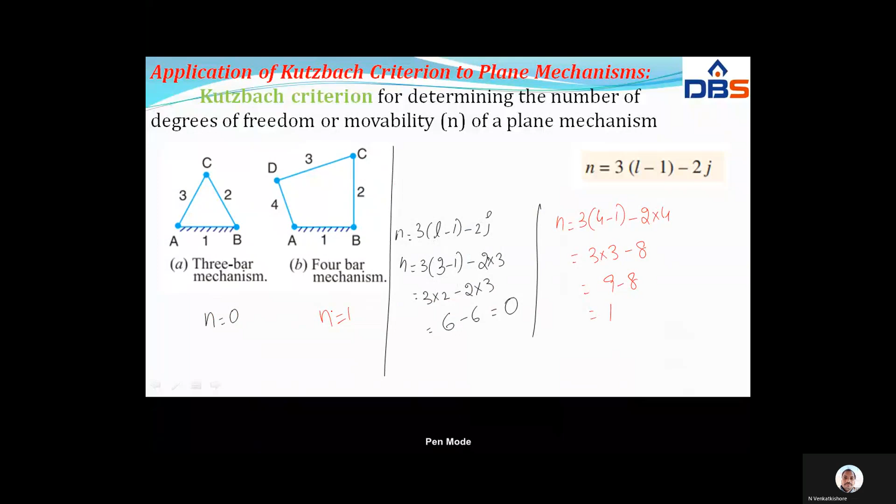So we will discuss these things at the end of this session. Then, the same way, we go for the next one.

It is problem C. n equals 3 into number of links, which is 5, minus 1, minus 2 into number of binary joints, so 3 into 4, minus 5 into 2, that is 10. So 12 minus 10. So for this case, n equals...

Then what about D? n equals 3 into number of links - 1, 2, 3, 4, 5 - minus 1, minus 2 into number of binary joints. Here the binary joints are B and D, so that is 2. Plus B and D are over, and one is A and C. A has 3 joints and C also has 3 joints, so 2 ternary joints equal 1 ternary equals 2 binary.

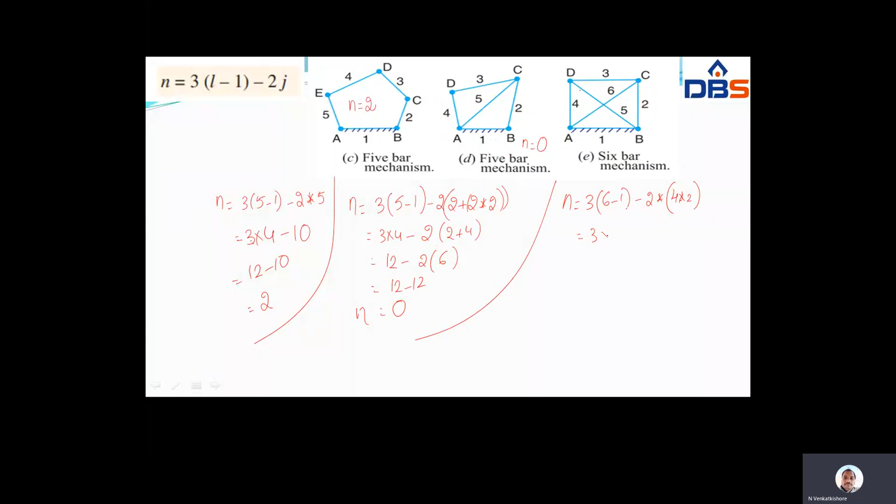Ternary, 4 into... so 3 into 5 minus 2 into... 15 minus 16. So minus, here n is equal to...

So now among all these we are concluding here. So we achieved n is equal to 2, n is equal to 0, n is equal to minus 1. So simply n is 0, 1, 2, minus 1.

So what is the case? When n is equal to 0, from the diagram, what are the problems we are having? In the problem A and D and B. See here 0, D and A. D and A, in the figure A and D, we are getting the number of degrees of freedom as 0. That means no degrees of freedom.

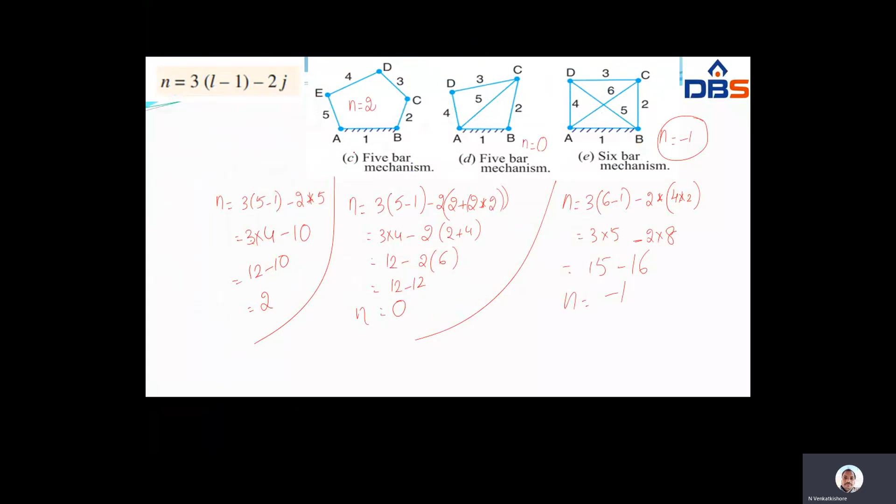When n is equal to 1, this mechanism occurs where? In B, figure B. So this mechanism can be driven by a single input motion. Next, n is equal to 2 means two separate input motions are necessary to produce constrained motion. That is occurred in figure D. So in figure C, we are getting the same. And whatever the last one, when n is equal to -1 or less, there are redundant constraints in the chain.

It forms a statically indeterminate structure. So it is not a structure. Beyond the structure, it is indeterminate, meaning we can't even frame the structure. So n is equal to 0 means it is a structure. N is equal to 1 means one single degree of freedom, one input motion is enough to move the mechanism. And n equal to 2 means two separate input motions are necessary to produce the constrained motion of a mechanism. N is equal to -1 or less than 0 is nothing but redundant constraint.

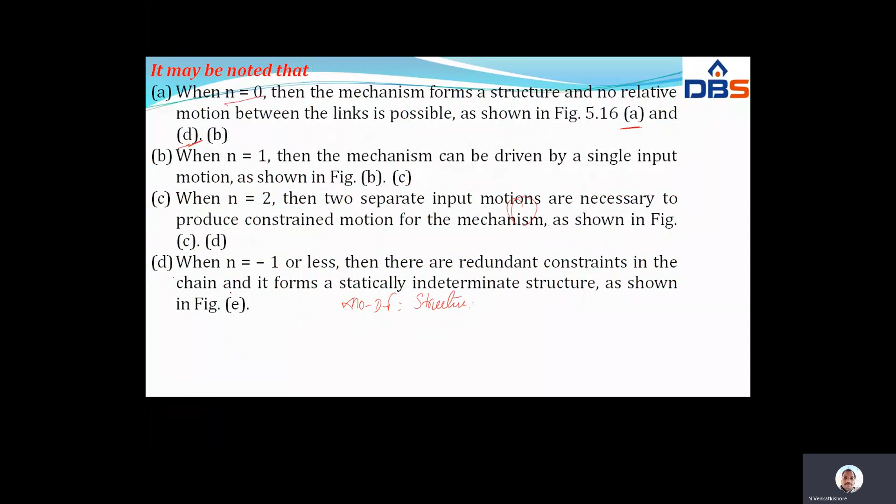So next we will solve the same equation for some different models. If you see here, this is also like the same thing, but with link 1, 2 and 3. So here it is of a structure like this, or the mechanism will be like this. Mechanism is one thing, one link was fixed, but here you just need to concentrate on this: second and third are framing a point, or they are in contact either by a line or a point. They are closely contacting, looking like a point or a line.

So the point or line means here the higher pairs come into the picture. Then the formula becomes n is equal to 3 into l minus 1 minus 2j minus h. This is the basic Kutzbach formula. Substituting: n is equal to 3 into number of links as 3 minus 1, number of joints it has 2, minus higher pair is only 1. So, 3 into 2, 6 minus 4 minus 1. So 6 minus 5, that equals 1. So in this case, 1 degree of freedom.

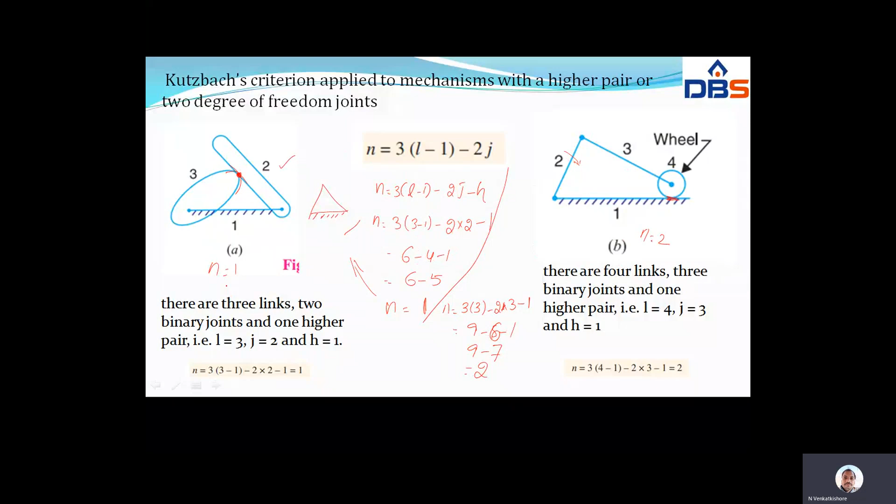Coming to Grubler's criteria for plane mechanisms. This mechanism applies only when single degree of freedom joints are there. So single degree of freedom means this equation will be applied. Grubler's criteria is only applicable for single degree of freedom, that means n equals 1.

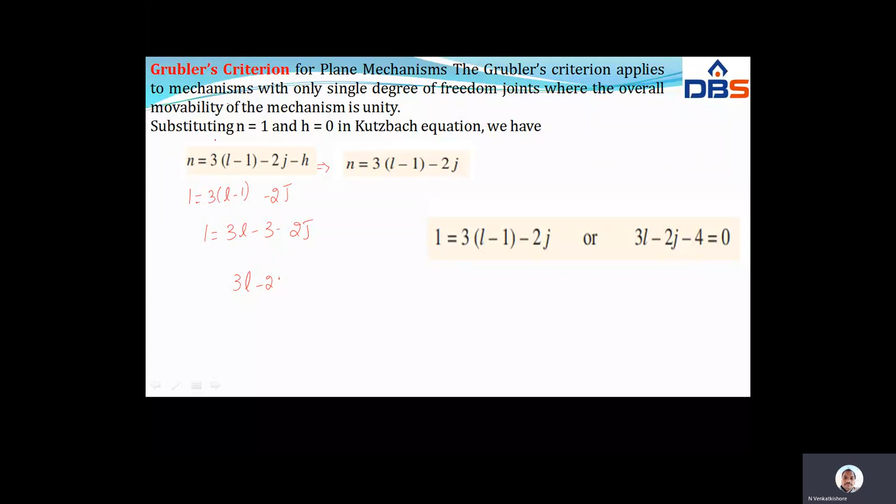And 3l minus 1 minus 2j, and at the same time no higher pairs are there. So this becomes 1 equals 3l minus 3 minus 2j, that is 3l minus 2j equal to 4, or 3l minus 2j minus 4 equals 0.

This formula we will call Grubler's criteria or Grubler's equation. So where are we getting this equation from? That is the Kutzbach equation. When the Kutzbach equation has only a single degree of freedom, it becomes Grubler's criteria.

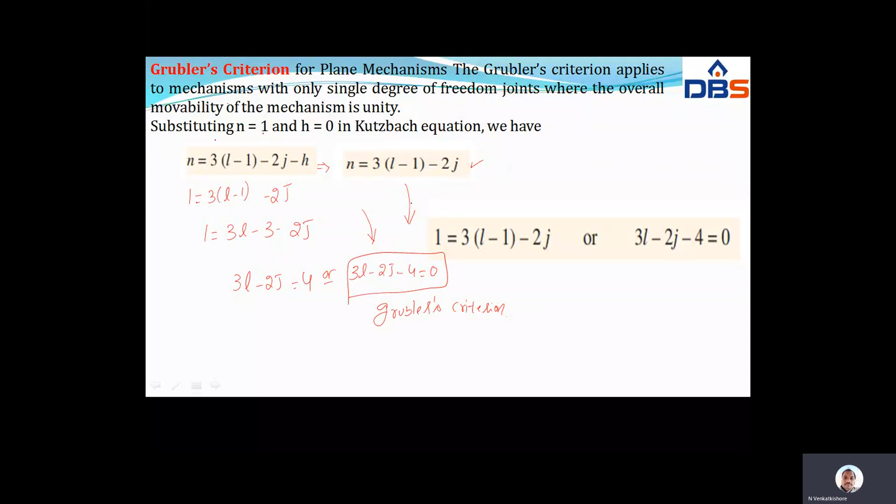This Grubler criteria for plane mechanism is with constrained motion, and we are having a 4-bar mechanism and a slider crank mechanism in which the number of links equals 4 and the number of joints is 4. So for what mechanism can we frame this? Only a single slider crank mechanism will form this Grubler's criteria.

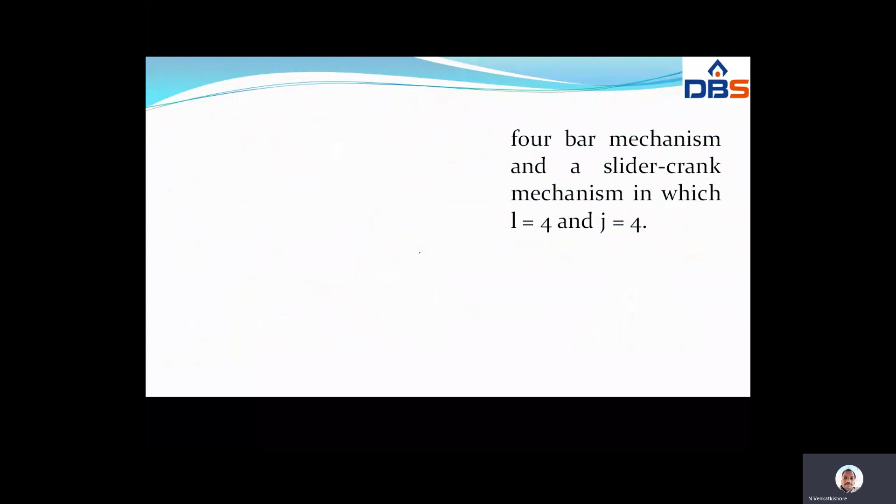And next, the inversion of mechanism. Inversion means, see here, what is a mechanism? Mechanism means when one of the links is fixed in a kinematic chain. So this is a chain having A, B, C, D and E, and this is link 1, link 2, link 3, 4.

If one link is fixed, that is called a mechanism. So here we fix the AB link, the first link is fixed. This is a mechanism, it is a simple mechanism.

So when we change this fixing, if we change the fixing from AB link to AE link, we are fixing only this link instead. So the fixed link is changed from AB to AE.

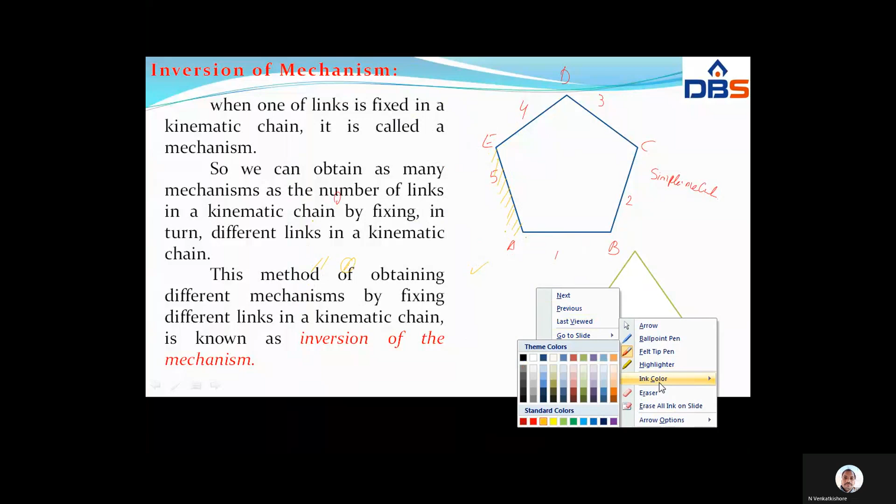So the inversion of mechanism means moving from the original. If you fix AB, that is link 1, we achieve a mechanism. If you fix the second link, we get one more mechanism which is different from the original. Let us consider this as the default mechanism. If you change the fixed link from 1 to 2, it forms one more mechanism which is different from the default mechanism.

This is an extra mechanism, and similarly if you fix link 3, we will get some other mechanism, and similarly for 4 and 5. So in this case, the inversions of the mechanism are 4. That means from the default mechanism, we achieve 4 different mechanisms by fixing different links in a kinematic chain.

So that is called inversion of mechanism. Inversion means the conversion of the mechanism, or the modification of the original mechanism, which we call inversion of mechanism. So this method of obtaining different mechanisms by fixing different links in a kinematic chain is known as inversion of mechanism.

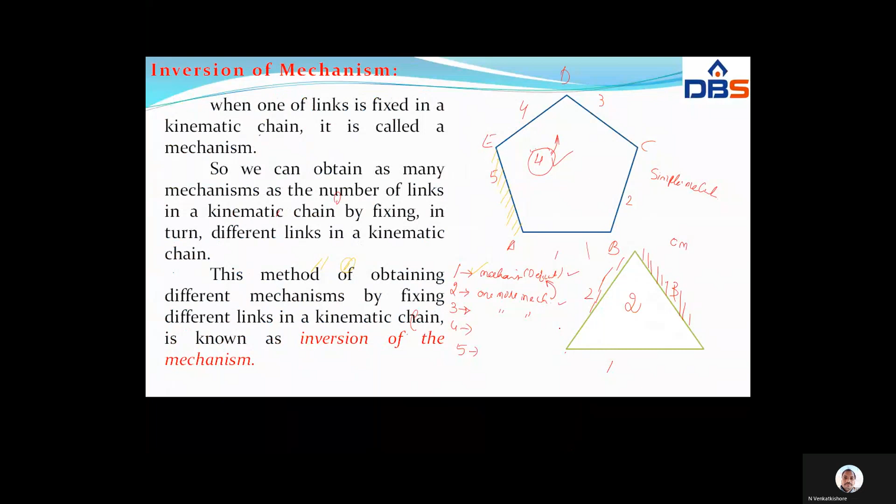This is called the inversion of mechanism. Then kinematic chain types: it may be noted that the relative motion between the various links is not changed. The motion of various links may not change in any manner throughout the process of inversion, but their absolute motion may change by changing the fixed link. So their relative motion may not change, but their absolute motion will change. This is a very important point to note.

Next, types of kinematic chains. The most important kinematic chains are those which consist of 4 lower pairs. Lower pairs mean they have only surface contact. Each pair may be a sliding pair or a turning pair. So in a kinematic chain consisting of 4 lower pairs, each pair may be a sliding pair or a turning pair.

Based on that, we are segregating these different kinematic chains, since with 4 lower pairs they differ from the subject point of view. One is the 4-bar chain or quadric cycle chain, and then the single slider crank chain and the double slider crank chain.

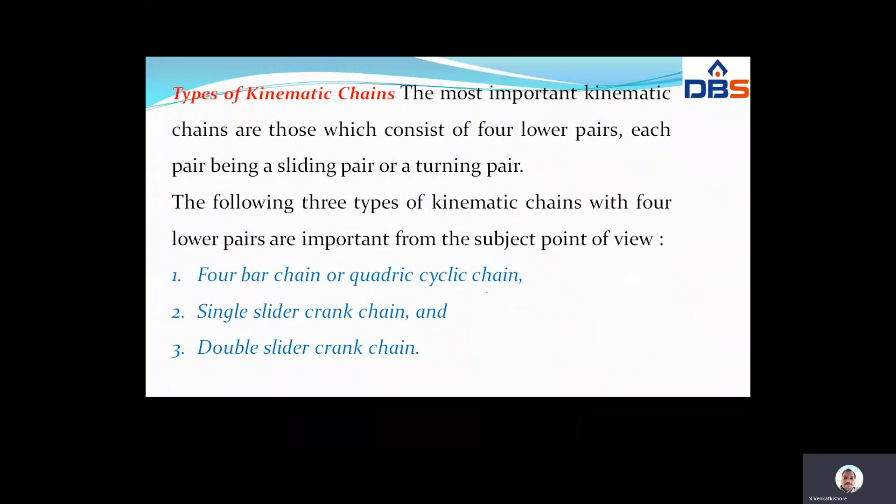Firstly, we go through the 4-bar chain or quadric cycle chain. We know that a kinematic chain is a combination of 4 or more kinematic pairs such that the relative motion between them is completely constrained. Whether it is a kinematic chain depends on following some rules, that is J equals 3L/2 minus... the formula we need to satisfy.

So for every kinematic chain, if it is a kinematic chain made of kinematic pairs, the relative motion is always completely constrained. This is the simplest and most basic kinematic chain: in a 4-bar mechanism it is a quadric cycle chain.

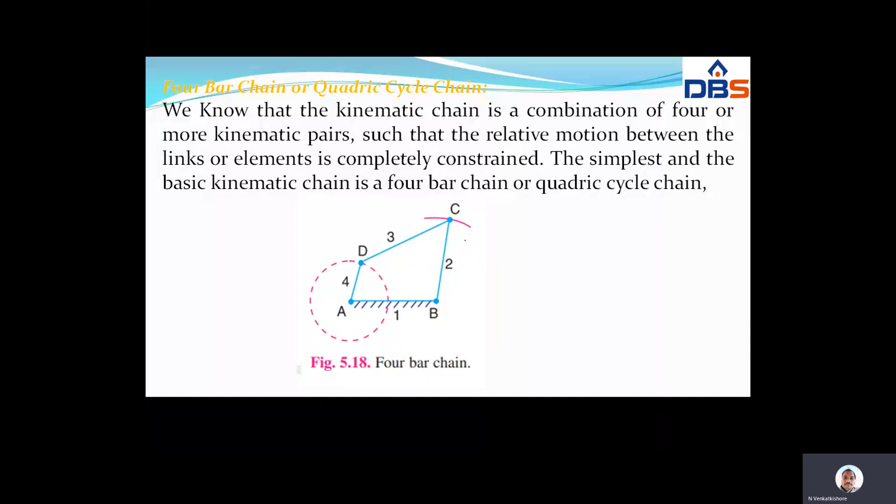It consists of 4 links. Each of them will form a turning pair, here at points A, B, C, D. So if you see the 4-bar kinematic chain, at every point A, B, C, D, they will form a turning pair, either a turning pair or a sliding pair, it has to follow one of these.

So in a 4-bar chain, it may follow turning pairs at A, B, C. But the links of the 4-bar chain will be of different lengths among all of them. So AB is not equal to the remaining 3 links. The first link may not be equal to any of the other 3. At the same time, the fourth link is not equal to the rest, that is 3, 2, 1 also.

So according to Grashof's law, for a 4-bar mechanism, the sum of the shortest and longest link lengths should not be greater than the sum of the remaining 2 links. So what is the shortest and the longest we are having here?

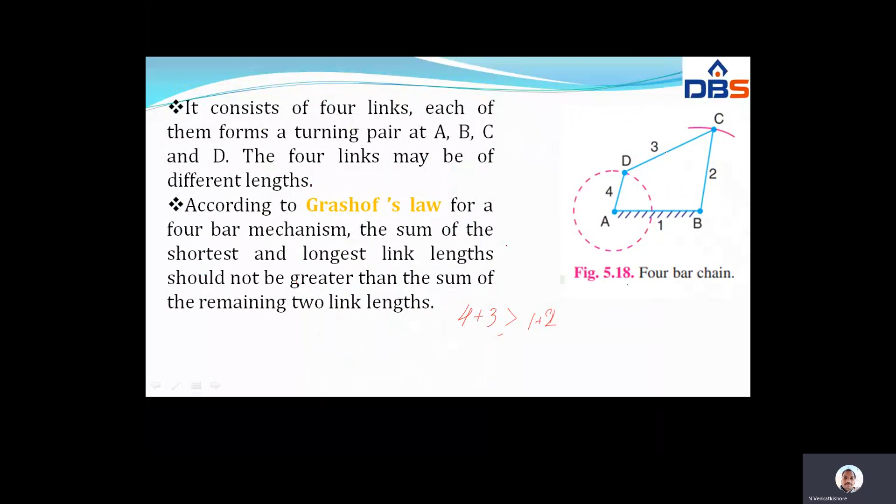An important consideration in designing a mechanism is to ensure that the input crank may make a complete revolution relative to the other links. So here we see what the cranks are and what the remaining elements are that we need to follow.

In a 4-bar chain, one of the links, particularly a short link, say link 4, will make a complete revolution relative to the remaining 3. So it is known as a crank. Among the 4 links, whichever one rotates 360 degrees, a complete revolution, relative to the other links, is known as the crank or driver, which we need to remember.

So here the crank is nothing but link AD, or the 4th link is the crank. Then coming to link BC, the 2nd link, which makes partial rotation, that is partial rotation or oscillation, is called the follower. Link 2 we call the follower.

So what is our operation? Here link 4 is the driver or crank that imparts the turning or rotary motion. The movement of link 2 is oscillatory motion. So rotary to oscillatory motion, and this motion is connected through a connecting rod of a 4 bar mechanism. This is the final thing we need to remember.

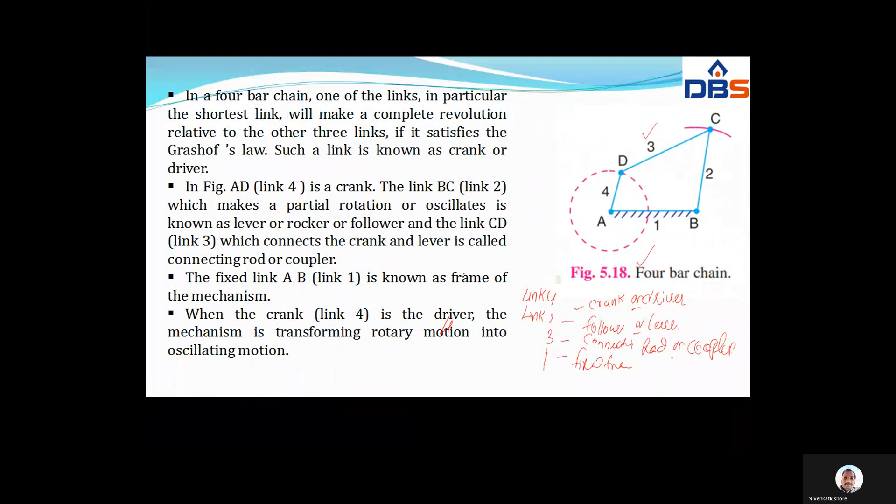So in any 4 bar mechanism which follows the kinematic chain, it satisfies the constraint motion. So briefly, what we can say in today's class is...

The Kutzbach equation, which we know as n equals 3 into (L minus 1) minus 2j minus h, is to be transformed to Grubler's criteria. But Grubler's criteria is only for single degree of freedom, where n equals 1 and there is no higher pair. So the equation n equals 3(L minus 1) minus 2j minus h will be transformed to 3L minus 2j minus 4 equal to 0. This equation we call Grubler's criteria for plane mechanism.

And what is the inversion of a mechanism? Inversion of mechanism is nothing but when one of the links is fixed in a kinematic chain, it is called a mechanism, and the number of links in the kinematic chain can be fixed in turn with different links. That means among these links, we alter the fixing of the links. By altering the fixing of the links, we get different mechanisms, and these mechanisms are found from the inversion of the original mechanism. That is called the inversion of mechanism.

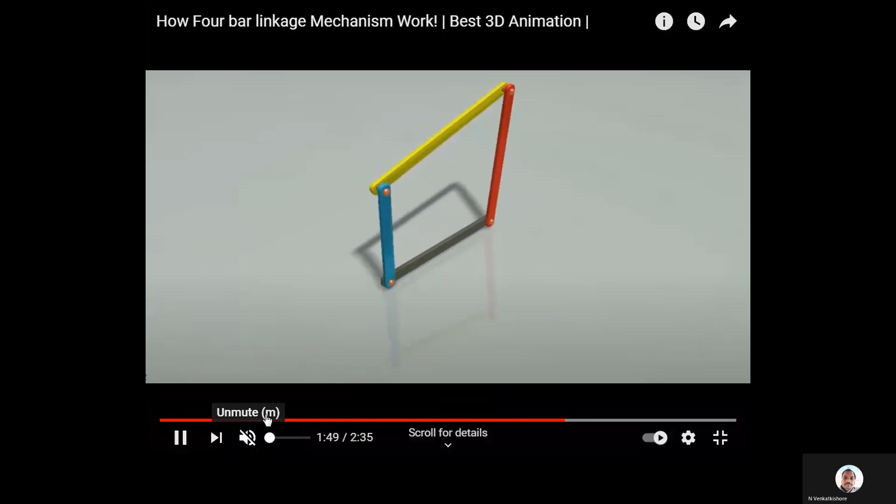See here, this is rotating about 360 degrees, so we call it a crank. The blue color indicates the crank since it is rotating 360 degrees, a complete revolution. And what about the red color? This red color is just partially rotating, or oscillating. That is called a lever. The blue color indicates the crank and the red color indicates the lever.

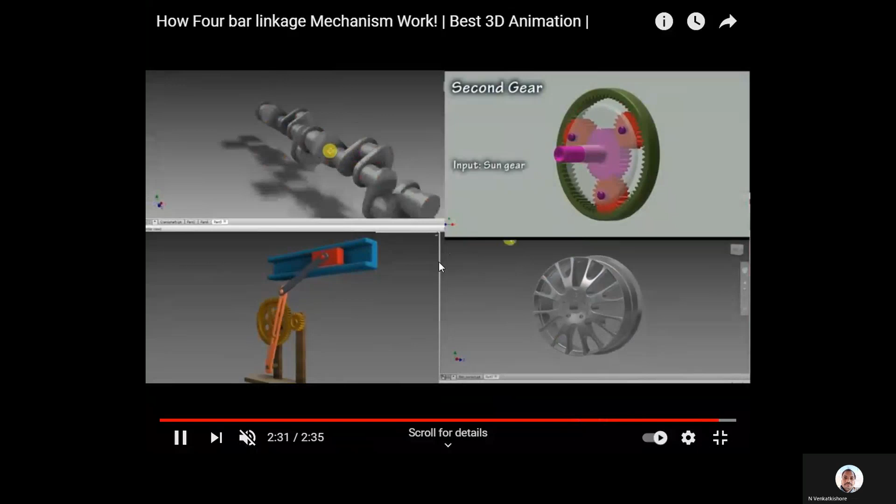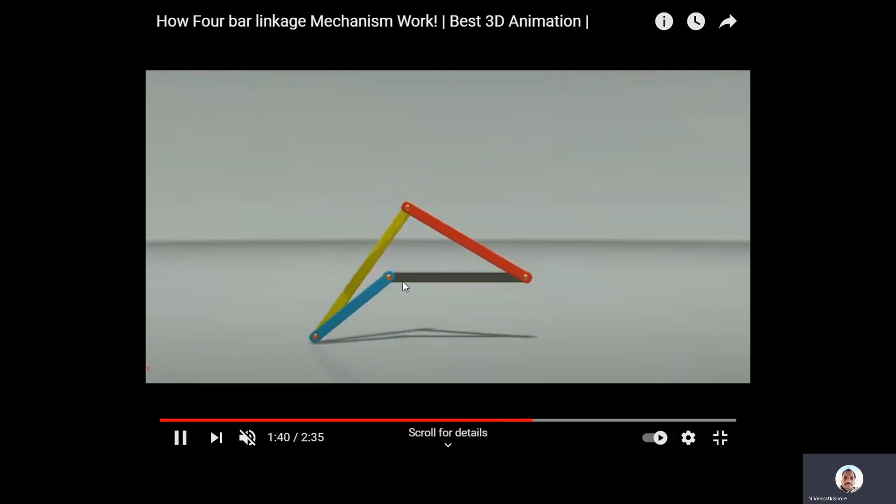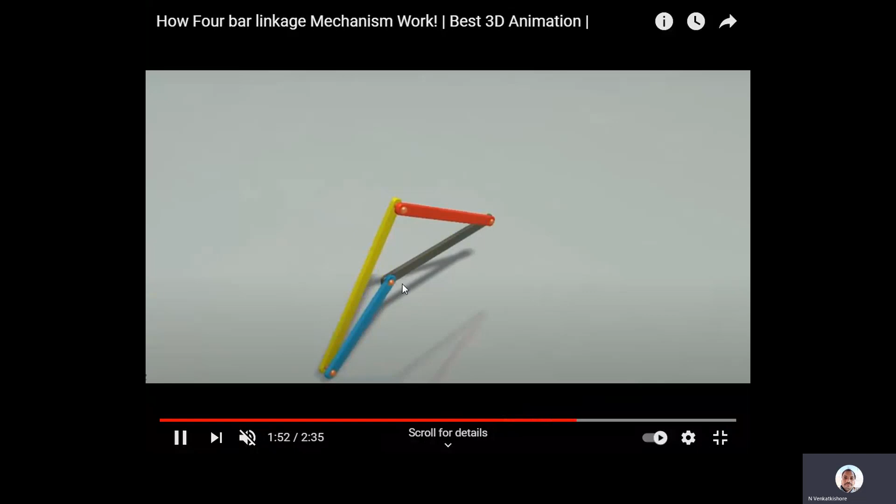The red and blue are connected by a connecting rod shown in yellow color, and at the same time there are no changes in the gray part's motion, meaning it is a fixed link. So here the crank is rotating 360 degrees and making the lever oscillate through the connecting rod. This is the 4-bar chain or quadric cycle chain.